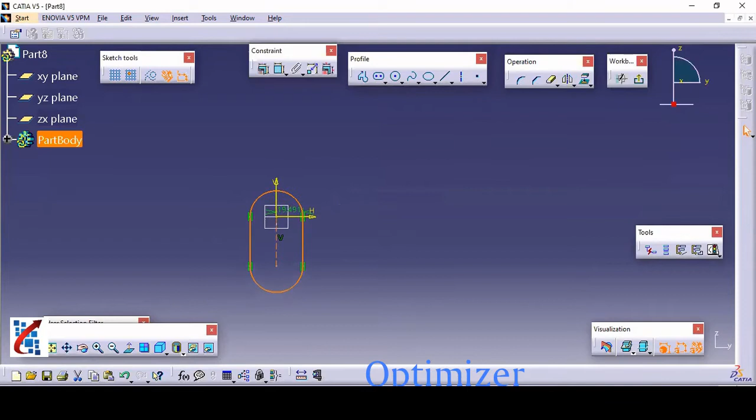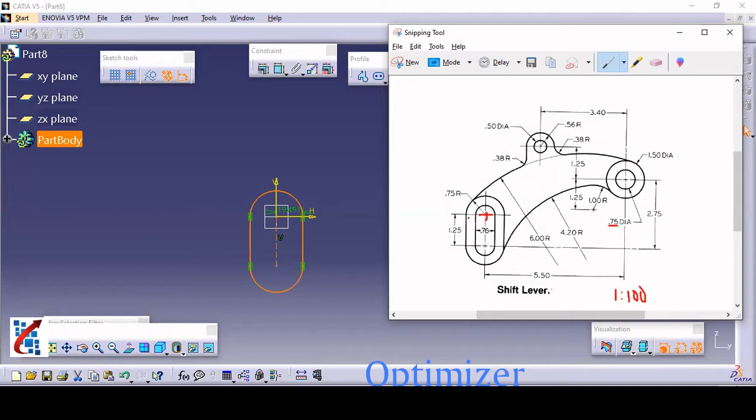If you just see this, these dimensions are very small, so we can consider a scale of 1:100. For example, it is 5.50, so instead of that, we will consider 550. This is 0.76, so instead of that, we will consider 76. Okay. So it will be... something error.

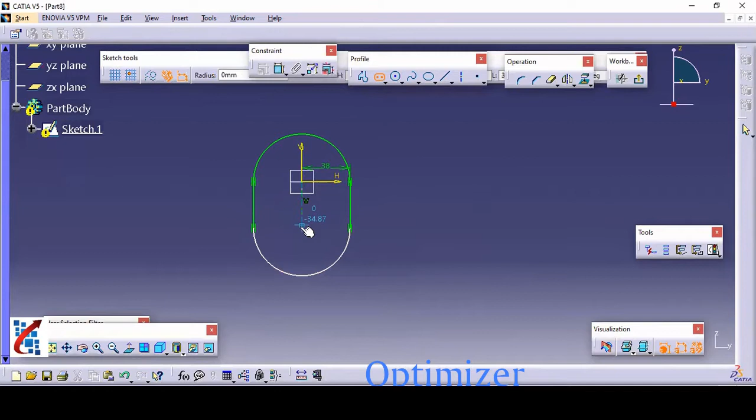Yeah. So just double click here, 76 divided by 2, that is 38. And it's not a centered rectangle, it is an elongated hole. It is of 75 radius, so just double click here and make this 75. The total center to center distance is around 125, so just make this 125.

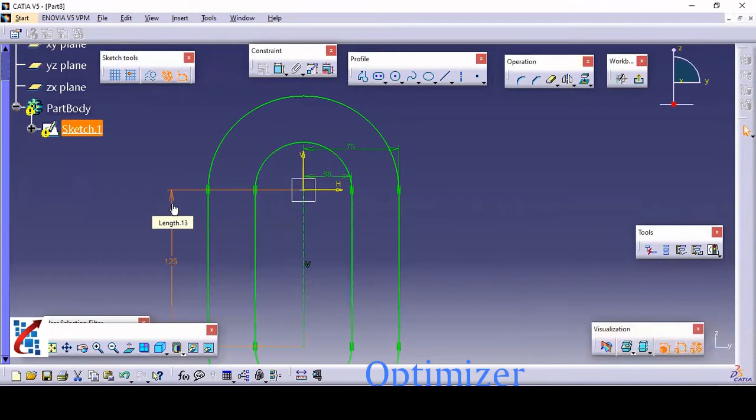Now there are two circles. First circle, second circle I have drawn, and just check the dimensions. It is 150 diameter and 75 diameter. So the first diameter, just go here and make it 150, and the second one is 75. Correct. So two circles we have drawn.

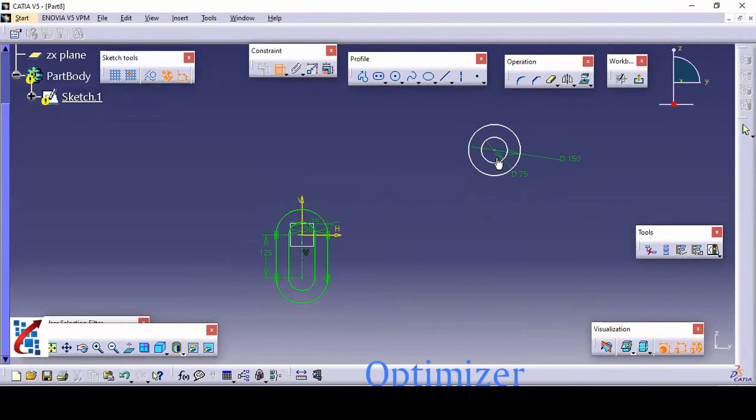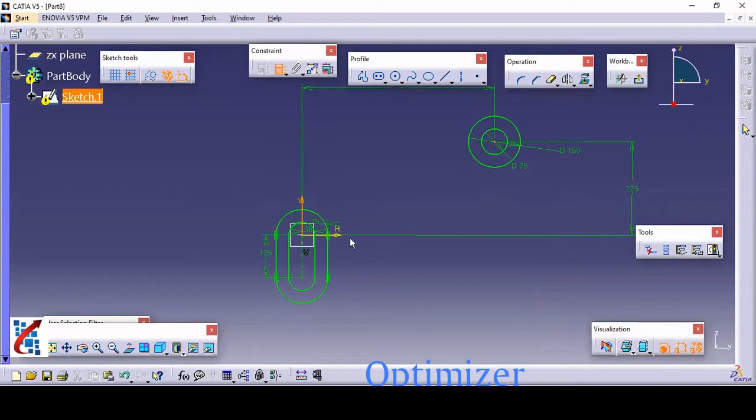Now we have to define the position of this circle relative to the origin. The horizontal distance is around 550, and the vertical distance is around 275. So 550 and 275. This is 275, and from this point this is 550. Correct. Okay.

Now if you just see, there is one 600 radius arc, which is tangent to this circle and this circle also.

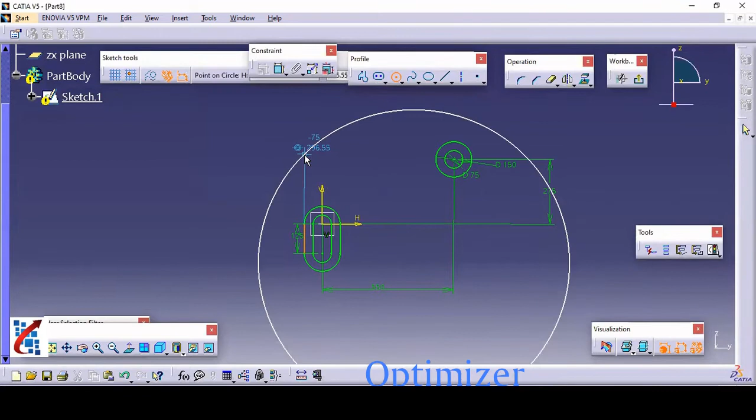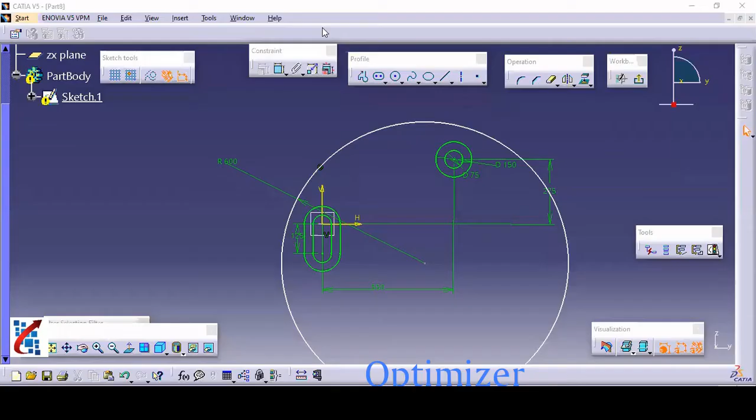600 R is there. So we are going to draw this arc which is tangent to this and this also. So let us start. A random arc I am going to draw like this, and you can give this as 600. Radius is 600. This circle is tangent to this circle and also to this circle, like this. Correct? Now you can trim this portion like this.

Now we have drawn this arc, and we are moving towards this arc. If you just see, there is one more 100 mm radius arc, and this arc is tangent to that one. The center of that 100 radius circle is around 125 from this center. Okay, so let us draw that.

So you can draw this arc of 100 radius, and this center is, in vertical distance, if you just check it, around 125. Okay, it is around 125. Now this and this circle are tangent to each other, tangency, correct?

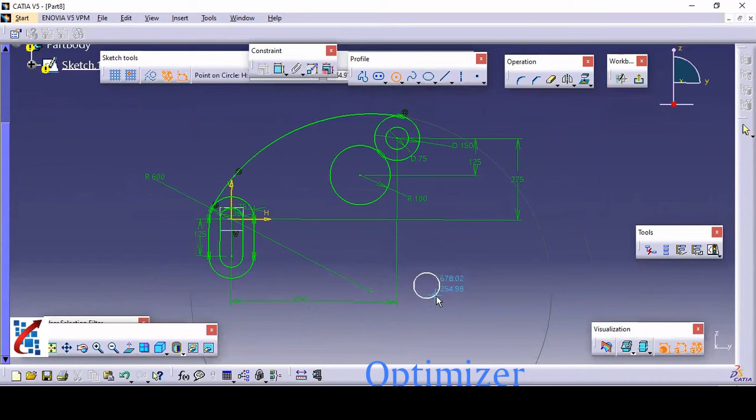Now there is one arc of 420 radius, which is tangent to this and this. Okay, so let us make it 420 radius. I will draw a random circle here, and now you can give the dimension to that, around 420. It is tangent to this circle, like this, and also tangent to this part, maintain tangency. Correct.

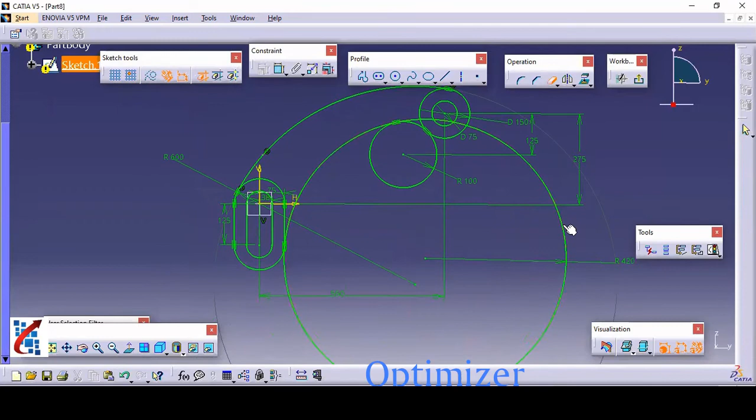Now you can trim the other part, as we don't require this part, this middle part, and this part. Okay, so this lower side we have finished. Now only this part is remaining, so let us focus on this part.

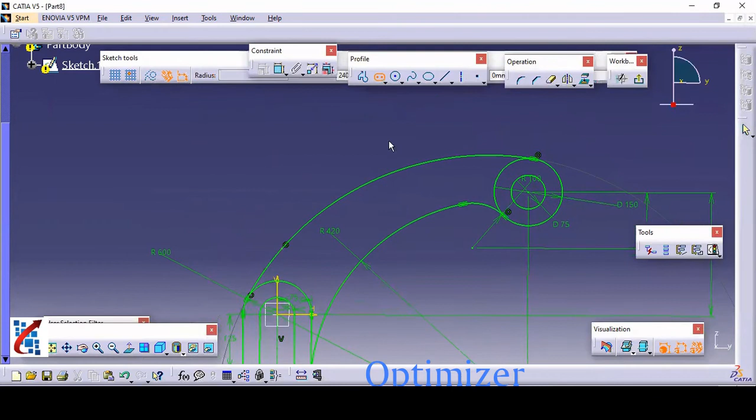Here two circles we need to draw. The first circle is 56 and the second is 50 diameter. You can use an elongated hole here also, like this. The bigger circle is around 56, and one more small circle is of 50, so radius is 25, you can say.

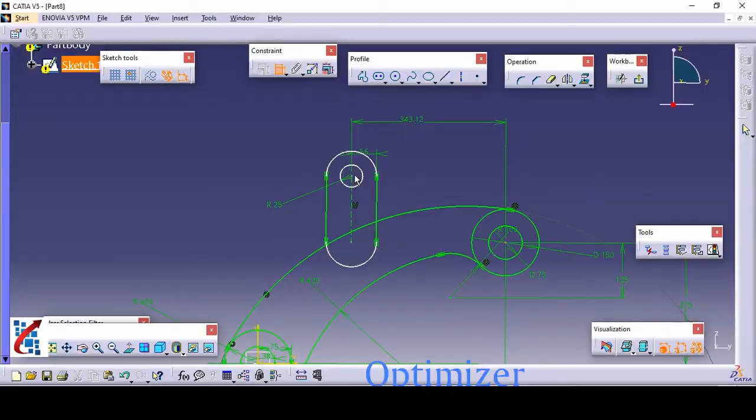Now you can give a distance. It is around 340 in this direction, and 125 from this one. This horizontal distance is 340, and here we need to give the vertical distance from this to this, like this. It is around 125, correct? So let us see now.

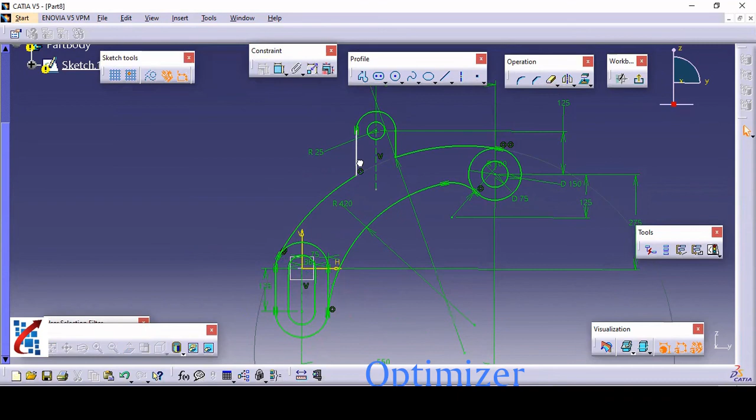We just need to trim this middle part, like this, and we make this line a vertical line. Okay, just click on OK. If you just compare, I think we have covered all the things. Only these fillets are remaining, so we can add them.